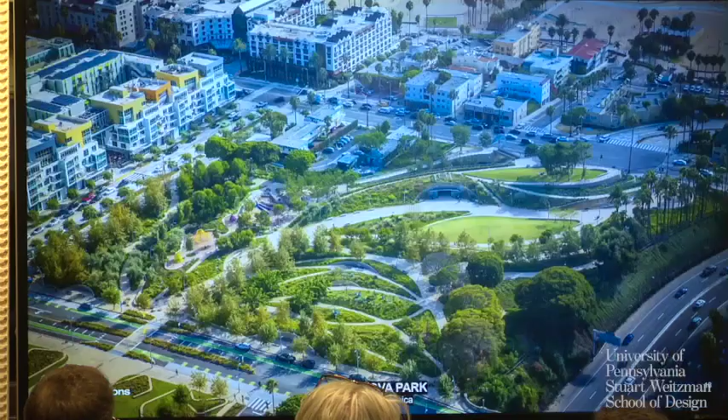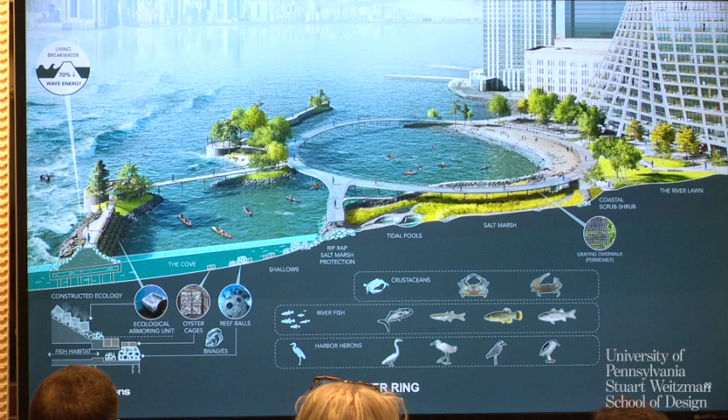This year's field operation celebrates our 25th year of practice, and we still believe in the power of nature in the city. The High Line, a simple garden walk that forever changed the west side of Manhattan. In Santa Monica, a parking lot is a topographically dynamic urban oasis. And the tunnel tops, opening much more recently, a park on top of a highway that has brought the city to the bay. Soon, the River Ring in Brooklyn will become vital habitat.

But these projects are not only successful at an urban scale or for environmental resilience. They're significant in the way they function for people at an intimate human scale.

As nature appears in the city, it renders place as a common ground for our social life, our most intimate relationships, our collective cultural expression and identity, our laughter and our play. It is where we make memories and come together to demonstrate, where we have civic discourse, where we exercise and move, but also where sensory stimuli engages our deepest emotions, provides us with comfort and serenity, and with that, a sense of belonging—really all of the essential, extraordinary experiences of our humanity.

So much of our practice is about shifting scales, from large plan and vision to designing for people.

And before we dive into the middle branch, I'm going to just touch on two other waterfront projects that have been in the office for a decade, because great plans need to come to fruition to affect change. So in that regard, I'm going to offer us all some motivation and inspiration, especially Brad and Ethan, because this is exactly where we are right now on the middle branch. We're launching that process right now.

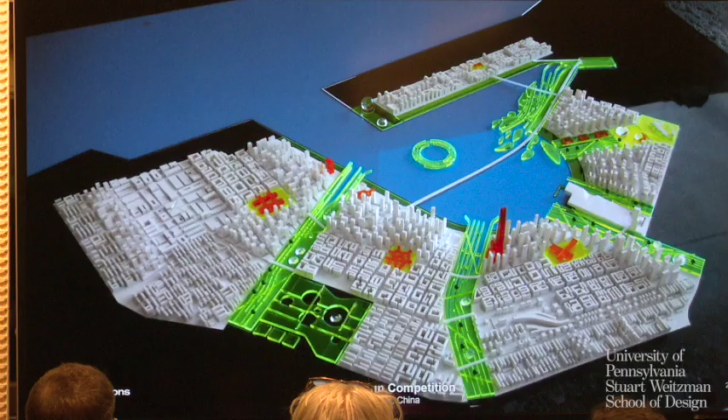So our 2010 competition entry for a new eco-city in Shenzhen was radical in scope and scale. It envisioned a city organized around its waterfront by a series of five water fingers. This resilient urban framework was the underpinnings of an integrated approach that defined neighborhoods, transit, energy, economic, and green systems.

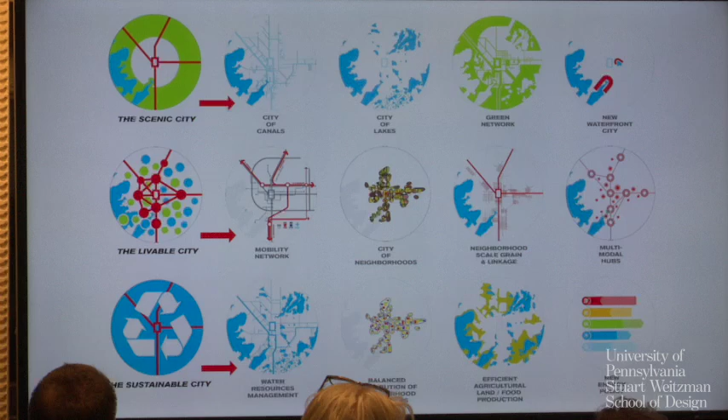Fast forward to today, 14 years later, and Shenzhen's 110-acre Guiwan Park anchors the edge of a new tech-focused central business district and is the first of those five green fingers to be realized. This is truly extra large-scale green infrastructure for stormwater management, flood protection, and biodiversity.

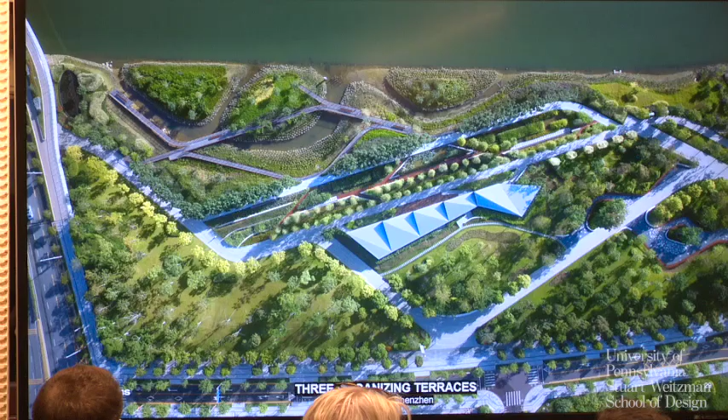Here you can see three organizing terraces: the uplands, the freshwater wetlands, and the brackish wetlands. The freshwater wetlands manage stormwater runoff from the city as a living filter. They too are botanically extraordinary—these hybrid landscapes, part performative wilderness, part botanical garden for pleasure and delight.

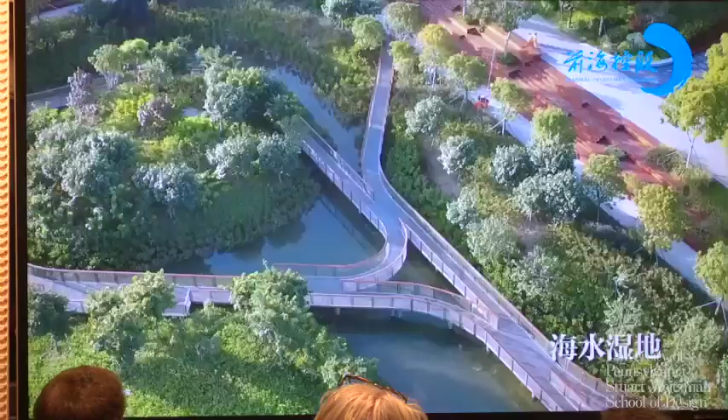Overall, Guiwan and its relationship to this resilient urban framework showcases the potential for urban growth to achieve both environmental and social impacts.

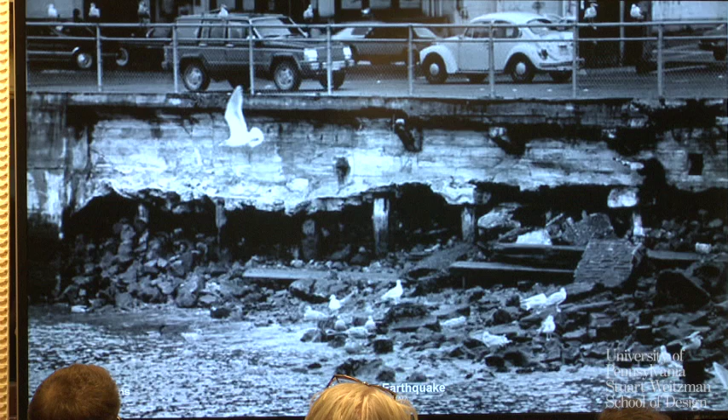Like Guiwan, now on the west coast of the United States, Seattle is a place that had turned its back on its waterfront. In 2001, the Nisqually earthquake presented the opportunity to fundamentally change this relationship because of the irreparable damage to both Seattle's seawall and its two-story viaduct.

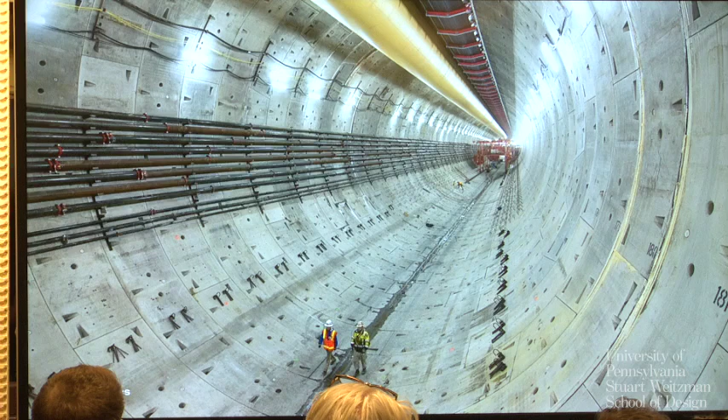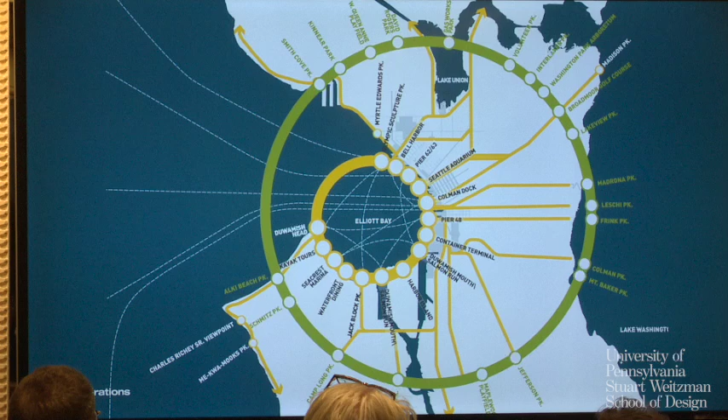So the city of Seattle decided to bury the waterfront freeway in a massive new bored tunnel, which opened up a huge new territory to rethink, an opportunity to rethink the organization of the city as a whole, developing, expanding, centering, and connecting Seattle's public realm to Elliott Bay, and to reimagine the edge of the city as an ecologically rich, connected green boulevard designed for people and habitat.

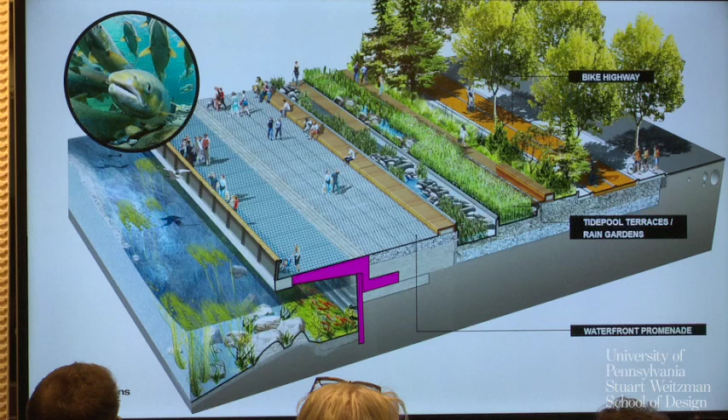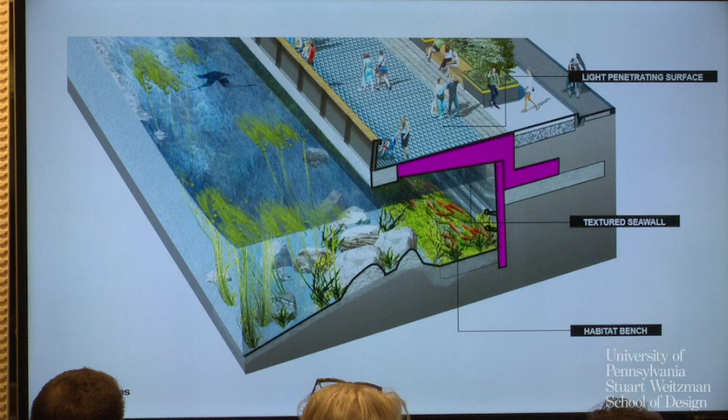By thinking about the edge holistically as a place for bike, pedestrian, and also salmon, and by pushing back the seawall, cantilevering the waterfront promenade with a new light-penetrating surface, a shallow habitat shelf is created, repairing a broken migratory line. The seawall has now been successfully overtaken by aquatic vegetation, reconnecting the food chain, and we have fish.

And where possible, the seawall was removed completely with soft and gently sloping beaches. And the new bike trail, just opening this past summer with its stormwater gardens, starts to provide a meaningful sense of place and to situate the edge in a more watery and verdant landscape that once defined the site. More to come this summer on this waterfront too.

But now the Middle Branch, yet another large-scale waterfront site with equally transformative potential. Unlike Guiwan Park or Seattle's waterfront, which are quite far away, you all have probably experienced the Middle Branch already, even though you don't realize it, because over 180,000 people pass over this largely forgotten site as they travel along the I-95 corridor each day.

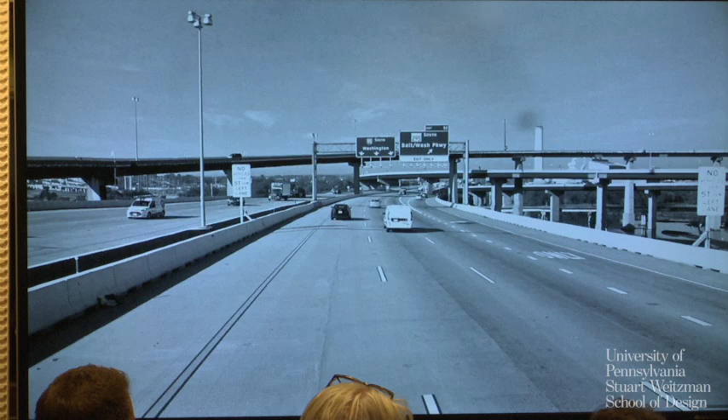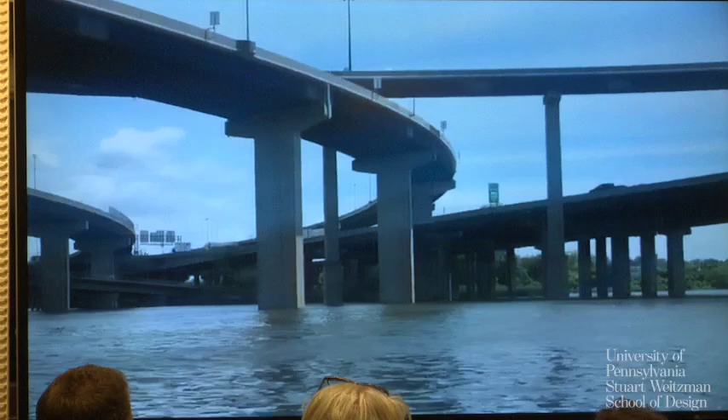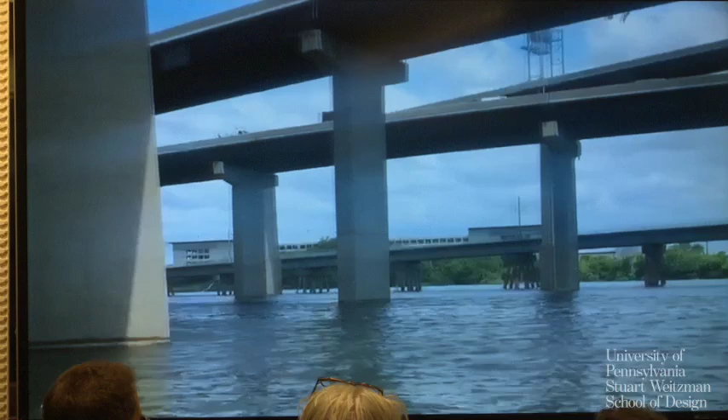The first day we experienced the Middle Branch below the spaghetti of highway infrastructure, what we heard was almost as important as what we saw: the sound of the highway, but also the chatter of some migratory songbirds that stop in Baltimore along the East Coast Flyway. This visceral experience of being on the open water, the cool breeze, the scale of the highway infrastructure surrounding us was kind of terrible, but both awesome and extraordinary.

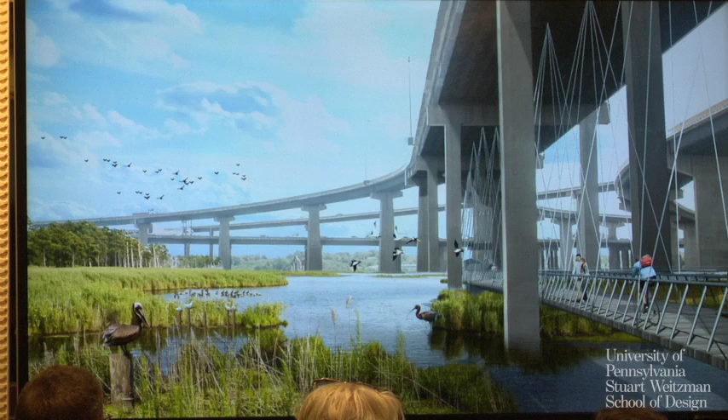But we didn't only hear the sounds of the site that same day as Brad's epic tour, which was so impressionable. We also heard and were moved by members of the community, and we asked about what is the Middle Branch's greatest asset. And again, we heard the same thing.

Good people. The people. That means the people is a real family vibe.

Strongest asset for the Middle Branch are the neighborhoods that surround it. The communities of South Baltimore are coming together and reclaiming their own waterfront, and they are establishing their rights to be there, establishing their own goals, what they want it to be, and they're charting a path for their future. So the strongest thing that we have going for us is us.

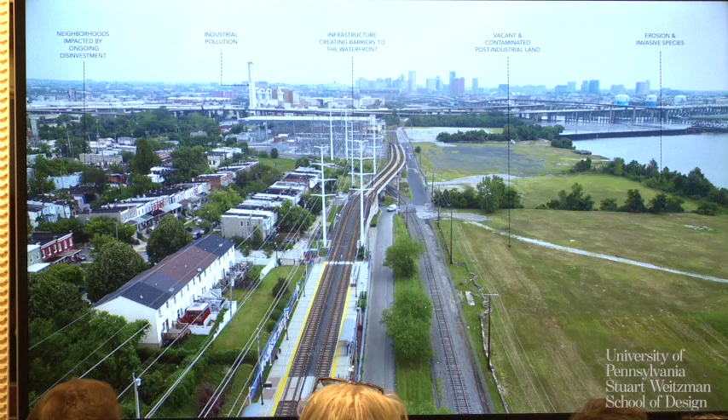Brad could not have said it better. The Middle Branch shows us how hard it is to overstate the connection between environment, health, and equity. And to that end, the scope of our project was perfectly expansive. I think, Fritz, you're right, the project did tick all of those boxes.

It also speaks to the power of new green and pedestrian networks to catalyze, improve access and connection, economic equity, cultural vitality, environmental resilience, and health and joy.

Our team was also expansive and multidisciplinary. It was not only field operations; as many of you know, we had 16 consulting collaborators, planners, multiple landscape architects, marine engineers, mobility consultants, JEDI consultants, just an extraordinary group of people.

And our process was and continues to be expansive as well, and Megan is going to talk about that in much greater detail. All of this really goes back to justice and equity, developing this project as a visionary plan, but also an iterative, community-driven initiative that amplifies voices not often heard. This plan is fundamentally about equity and justice, resilience and health, not only its physical transformation, creating new connections, jobs, wealth, and increasing quality of life.

I'm going to pass it on to Megan.

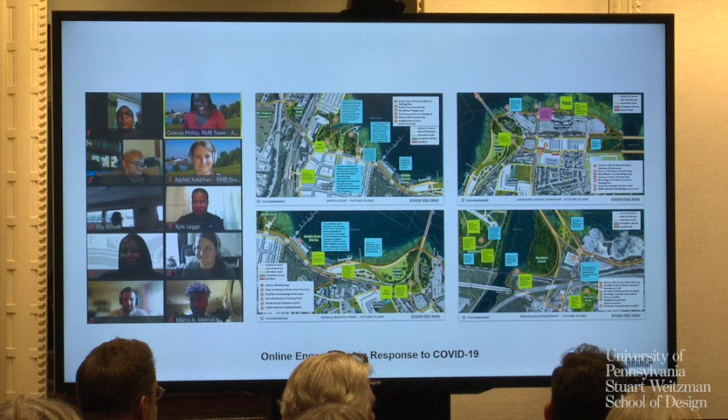This is our project map, and as you can see, we were doing planning work alongside consistent, varied, and iterative engagement throughout the whole 18 months we were actively working. We started online because we began during COVID in the summer of 2020, so we were doing virtual workshops when no one had done this before. We were discovering Jamboards on Google and Zoom, stumbling our way through it, while innovating with our local engagement consultants.

We had a very active social media feed, and we have an active website to this day. We insisted on innovation, and we insisted on our work always benefiting the community as we were moving forward.

We heard from day one that people were really skeptical of plans because nothing happens out of plans. They stay on paper, action doesn't happen. We're not going to trust that any of these pretty pictures are going to come to fruition, and if they do, it might be in 10 years. So we really took seriously the idea that we have to make change now, and bring benefits now. We did this in small ways.

For instance, on our Facebook and Instagram feeds, we did an interview series with members of the community, riffing on Humans of New York. We called it Voices of the Middle Branch, to bring community voices to the project so that it wasn't only us talking about these plans, but the community talking about their waterfront and their public space.

Once it was safe to be outside and be with each other, we started engagement in person. We created a mobile project hub and did pop-up engagement, visiting people in their communities at their events rather than always asking people to come to us. And when we did host events, we placed a big emphasis on community-centered programming and activities.

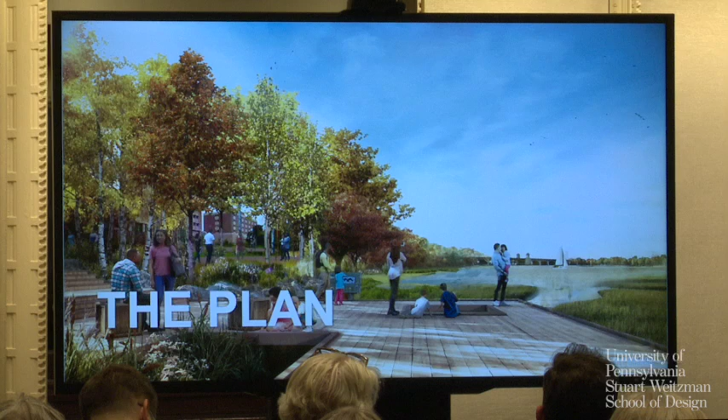So I think even before we get to the plan, we see all of this work as part of the plan. This is the plan in action. We're really proud that we were able to deliver these benefits alongside the long-term strategic thinking. We also hope that doing this type of work in a plan sets a new standard and precedent for what plans can do, and the type of action plans can take as the plans are being developed.

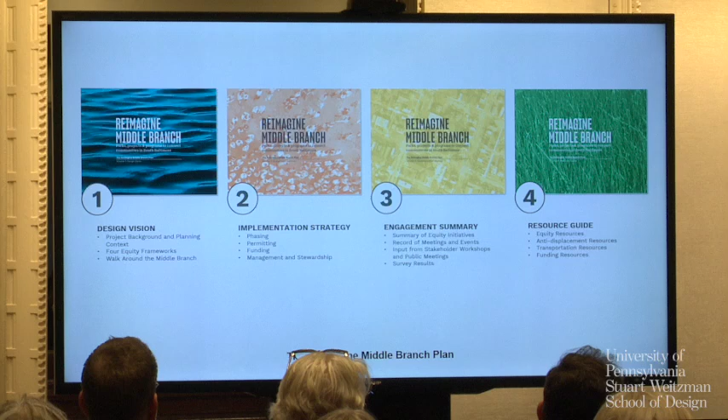And I think we have Ethan and Brad to thank for supporting these initiatives and these projects throughout the planning process. So now finally, 30 minutes into our talk, we're going to get to the plan and some of the long-term vision. So we produced over the course of 18 months a 4-volume document.

You can read it on our website, reimaginemb.com, if you're interested. We put together a design vision that looks at long-term, place-based transformations for the 11 miles of shoreline and the neighborhoods in South Baltimore. We also put together an implementation strategy that looked at how you phase this work, permit this work, who is going to fund it, and who is going to manage it—all really important questions to answer as you take on these transformative projects. We collated all of our engagement work to understand how community feedback shaped the plan, and we assembled a resource guide with deep dives into funding, anti-displacement, transportation, and more.

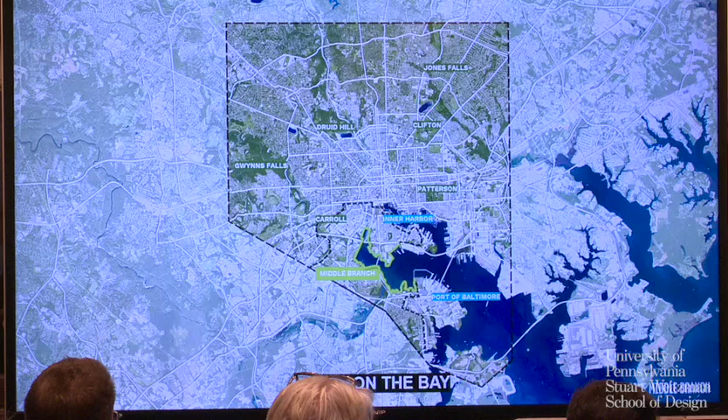Starting with a nuanced understanding of the site, the plan considers the Middle Branch at multiple scales—its place in the larger ecoregion of the Chesapeake, to begin. It's such an incredibly rich and dynamic environment. We asked ourselves, could we restore the Middle Branch's shorelines and reconnect to this magnificent ecosystem? We also considered the Middle Branch's role in the city. Baltimore is in many ways defined by its waterfronts—the industrial port, the cultural Inner Harbor—and we asked ourselves, could we create a green and recreational waterfront at the Middle Branch, distinct from these other places? And we considered the site within the context of South Baltimore.

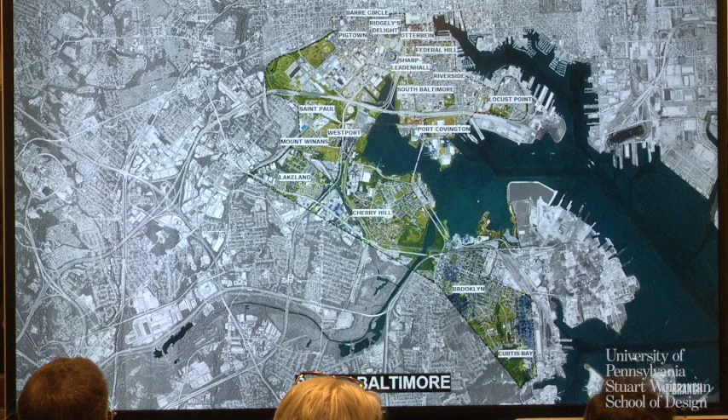This map shows the planned study area, which is quite large—as Sarah noted, 8 square miles. Rather than narrowly define the site as just the water body or the shoreline, we understood the Middle Branch more broadly as 19 neighborhoods, 30 parks, and 11 miles of shoreline.

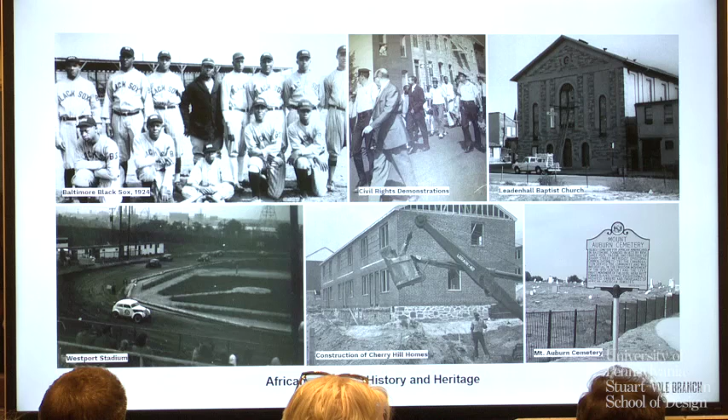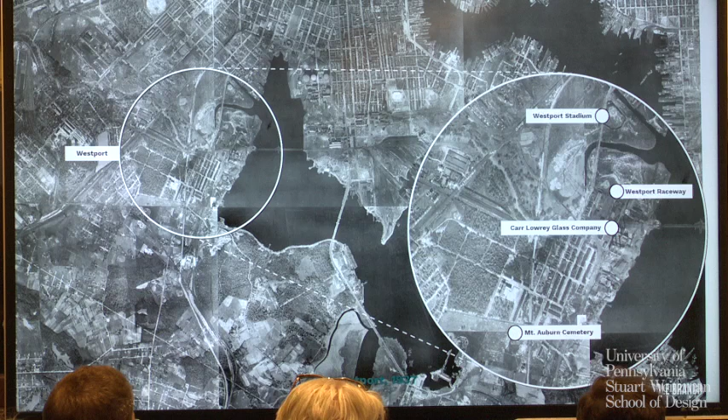We looked to the history of South Baltimore as we started, including the incredible legacy of African American heritage and culture in this area, which included two Negro League baseball teams and their stadiums. It was really the heart of the city's civil rights movement, and it houses, still today, Mount Auburn Cemetery. We also studied development patterns to understand what investment—but maybe more importantly, disinvestment—has looked like here over the last 70 years.

Along with the mapping and data collection, we visited every neighborhood and every park in the area to understand and appreciate the challenges, but also the incredible activities and opportunities that the plan needed to reflect.

The plan is organized into what we're calling 4 equity frameworks. These frameworks structure the work and recommendations that come out of the plan, focusing our efforts in 4 major areas. The first is to protect and restore the shoreline, speaking to the Chesapeake and environmental health. The second is about transforming barriers into connections—looking at that disinvestment, the slicing and disconnecting of neighborhoods and people from their waterfront and from one another. How can we heal those scars?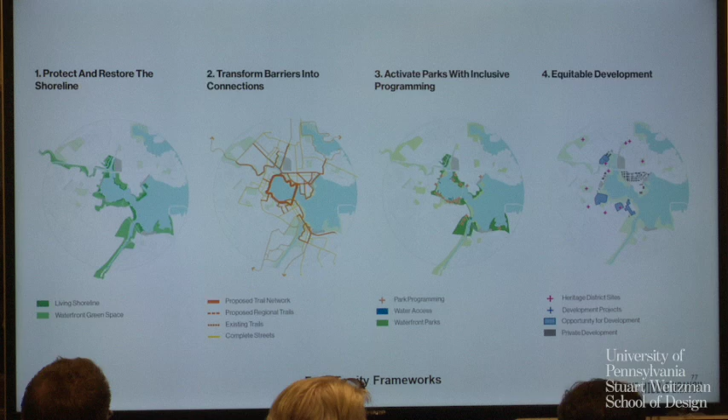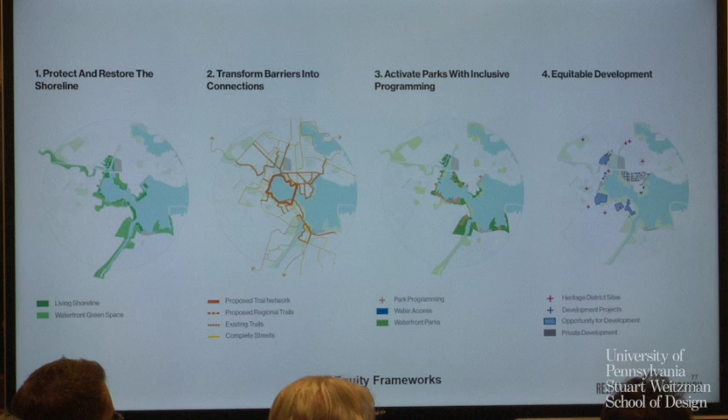Number 3: how do we activate parks with inclusive programming? How do we bring people to the parks and open spaces that are there? And finally, how do we think about equitable development and initiatives across this space to pair with these major public realm investments and improvements?

Altogether, the frameworks structure a series of short, medium, and long-term recommendations and investments in the Middle Branch. If you had to sum up the plan in one drawing, this would be it, even though it's very difficult to do. It starts to show the mosaic of projects across those 19 neighborhoods, starting at the waterfront and stretching into the neighborhoods, pairing transportation work with environmental work, parks, and development.

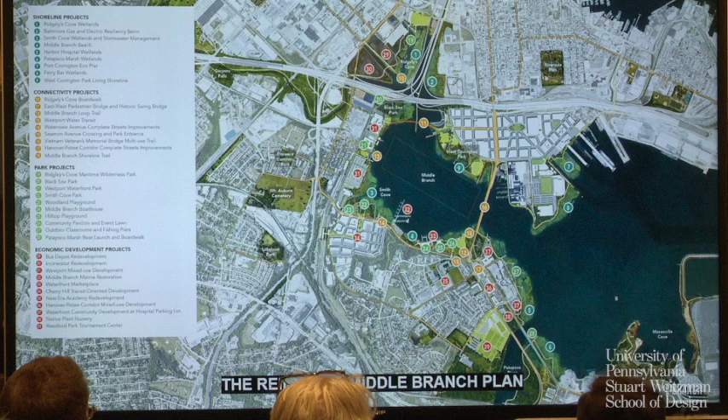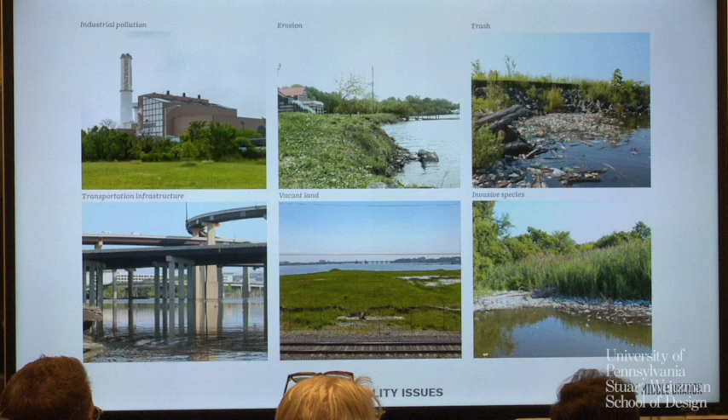I'm going to walk through each of the frameworks for you, starting at the shoreline. The Middle Branch, as we've seen, is this beautiful, quiet expanse with great views and access to the water, but there are a lot of environmental challenges, which you see here on screen. These are images we took during our initial tour. A lot of this is due to its location—the Middle Branch sits at the base of the Patapsco watershed.

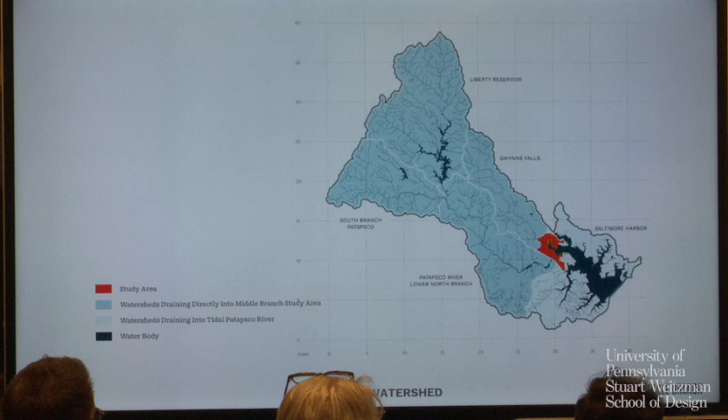What this means is that erosion, sediment, and all the types of pollution you see are concentrated and drained to the Middle Branch. So the Middle Branch carries this huge burden, and you see that in the poor water quality that's there today.

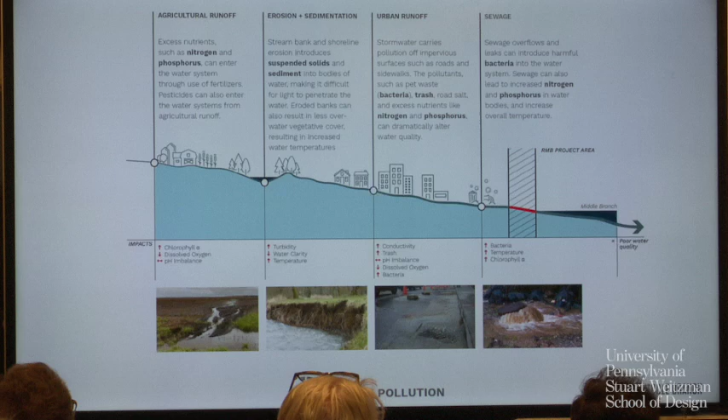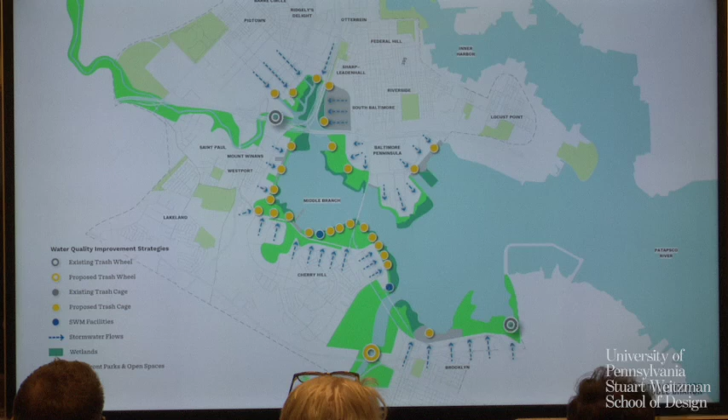So we mapped this to understand exactly where the outfalls and sources were, and then we overlaid on top of that a series of recommendations and improvements to look at the health of the water, the health of the ecosystem, and the shoreline.

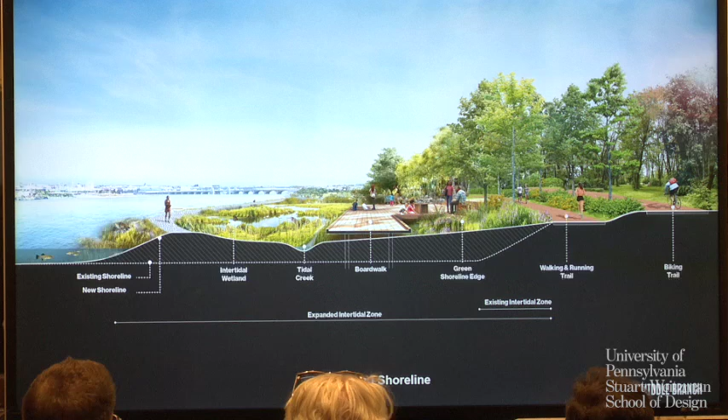Really, our plan looks at a continuous living shoreline, 11 miles of continuous living shoreline, soft green and resilient edges that expand the intertidal zone and protect from flooding and storm surge.

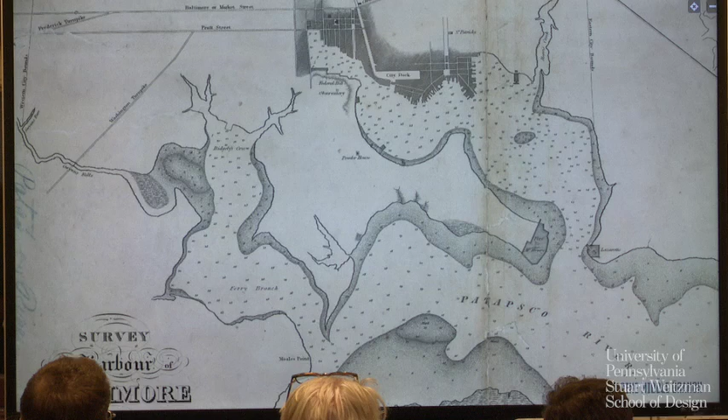This is really what the Middle Branch has been. This is a historic, pre-industrial map, and you can see this thick gray band are wetlands and marshes of the past. This is the Patapsco. It no longer looks like that, but this is sort of our North Star in a way.

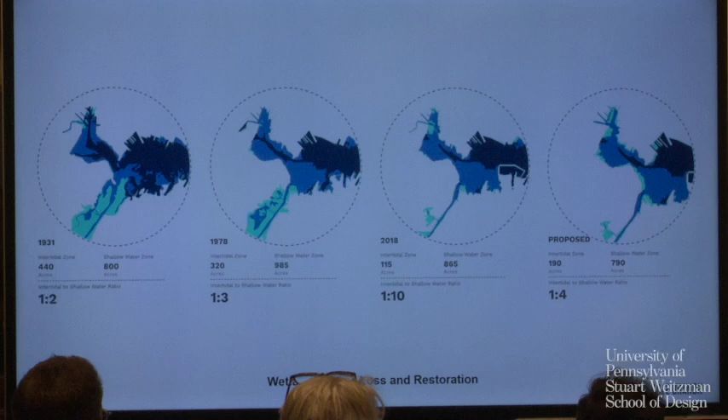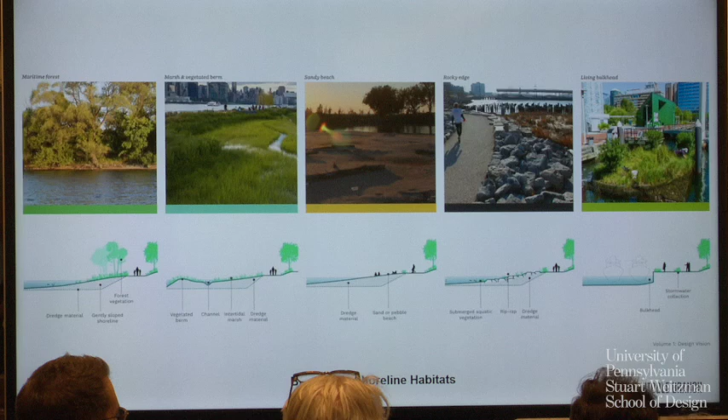This shoreline, this intertidal zone, allows us to create diverse shoreline habitats and areas. So the soft edges are not always the same. There's quite a diverse mix around the edges.

And these soft edges are going to not only create new habitat and new biodiversity and new places for nature and for people, but they're going to serve as protection for some of the area's critical infrastructure, including a regional hospital and the Baltimore Gas and Electric plant.

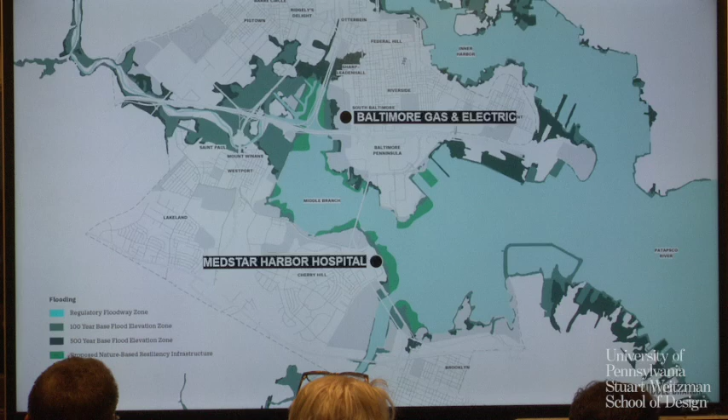The shoreline is also a place for people, offering access to nature and environmental education.

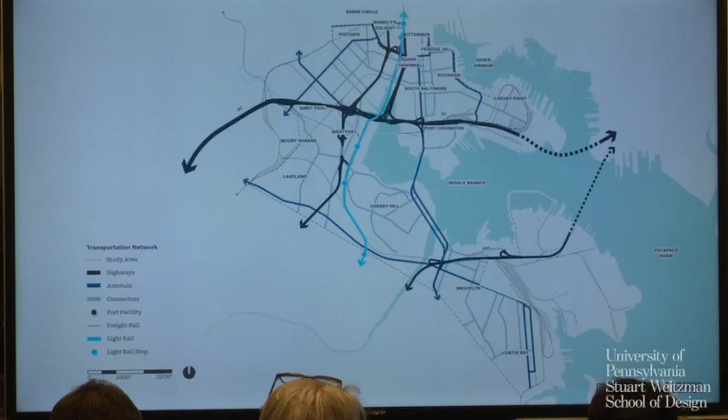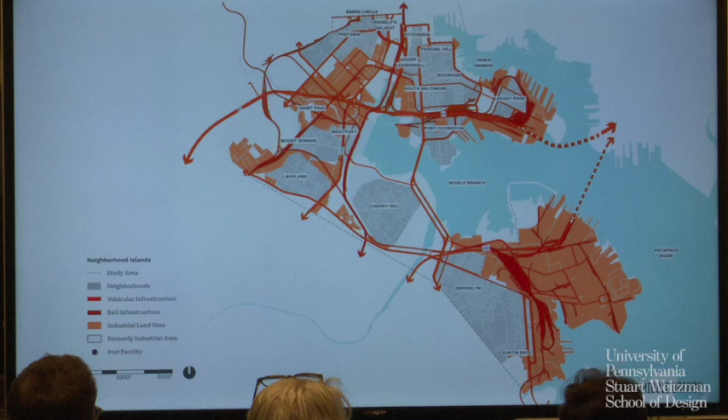Our next framework is about transforming barriers into connections. South Baltimore is filled with transportation infrastructure as well as industrial areas. All of this network creates barriers and really isolates neighborhoods into islands, separating them from one another and from their waterfront.

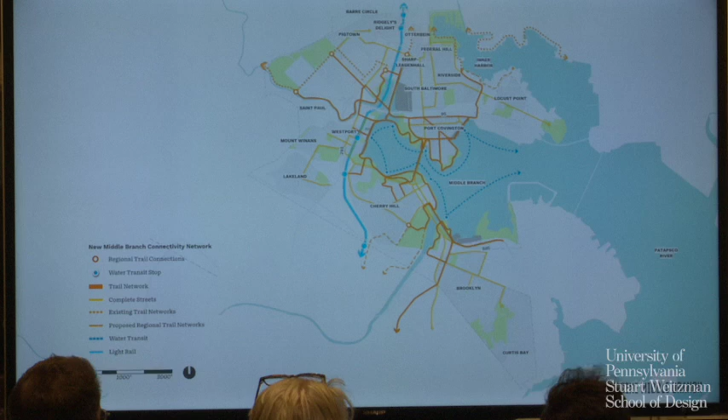So we're trying to transform this into a new system of connectivity and mobility: trails, complete streets, connections to transit, connections to water across the area. Our outreach efforts revealed there was a real desire for better pedestrian and bike connections in this area, and so the network really emphasizes this type of mobility.

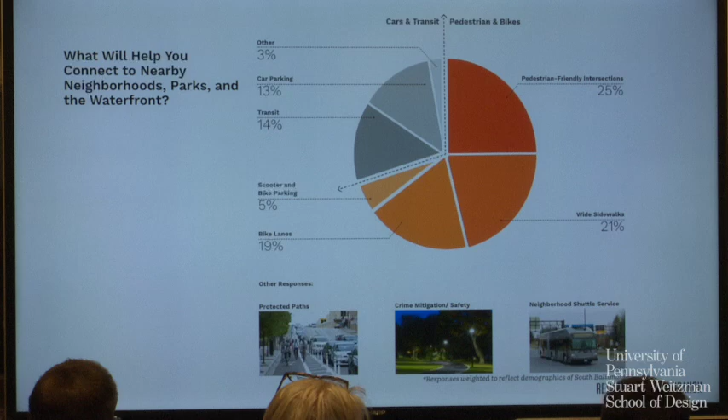The network centers around a new 3-mile loop trail at the heart of the Middle Branch. There would be separated bike and pedestrian facilities there, and from there, like spokes on a wheel, you would have complete streets and shoreline connections reaching back into neighborhoods.

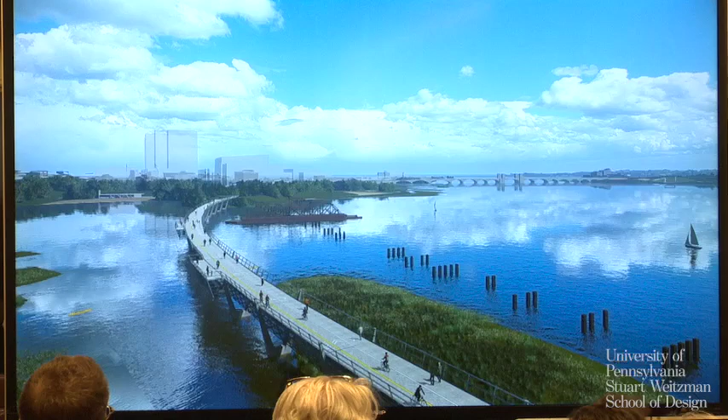The plan also recommends significant changes and improvements to two bridges that cross the Middle Branch. First, the Vietnam Veterans Bridge, which is in the distance. And then here in the foreground, you can see an east-west pedestrian bridge, which would essentially close that loop.

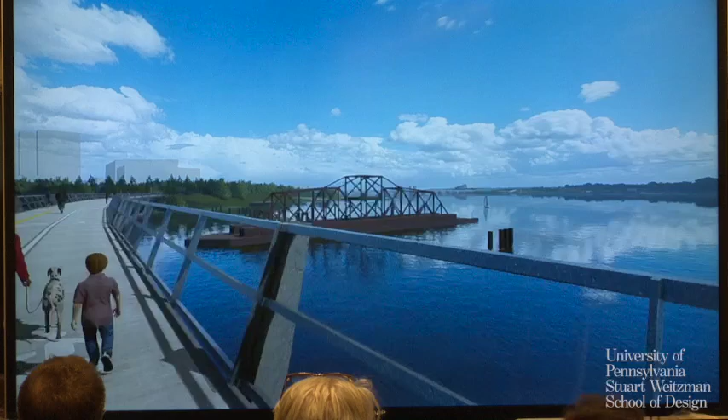For the trail, it would connect the neighborhoods of Westport and Mount Winans to the new Baltimore Peninsula development. And it would hopefully offer access to the historic and iconic CSX swing bridge here, which is a real fixture in the water that no one can access today.

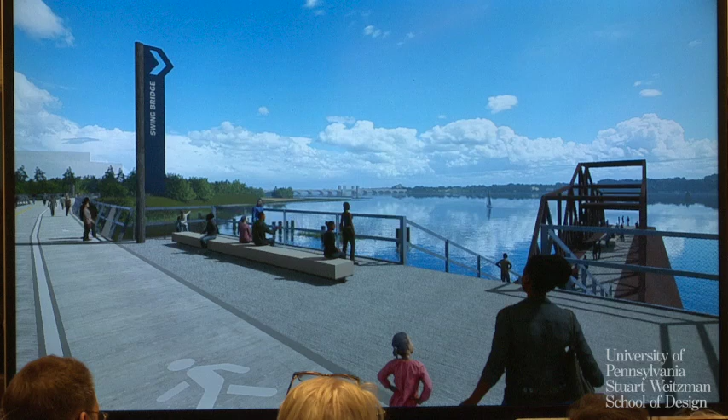Our third framework was about the park system in South Baltimore. Ethan coined the term 'park shed,' like watershed, and we love this idea of a connected system of parks.

It's already a place rich with parks, and as we worked with Baltimore Rec and Parks, they said, please no more parks, we have more parks than we can manage. We hear this in Philadelphia too. It's very difficult and costly for cities to manage their park system.

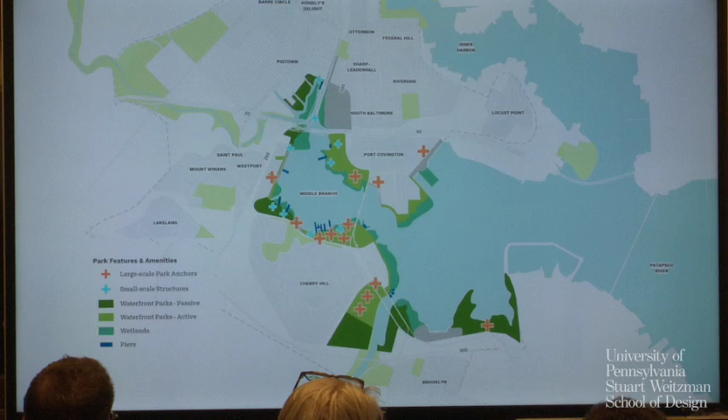So rather than growing the number of parks and expanding park access, we really looked at improving the parks, activating the parks, enhancing the parks that were there. This map starts to show where those improvements and activations might happen.

We took cues from a project that was already built, a sort of pilot project in one of the parks around the waterfront. This is the Middle Branch Fitness and Wellness Center, a $25 million facility opened in Reedbird Park during the planning process. It serves to activate and animate this park and provide amazing benefits to the communities here. There's pools, sports fields, community centers, and how could we take the same approach and move that around the entire Middle Branch?

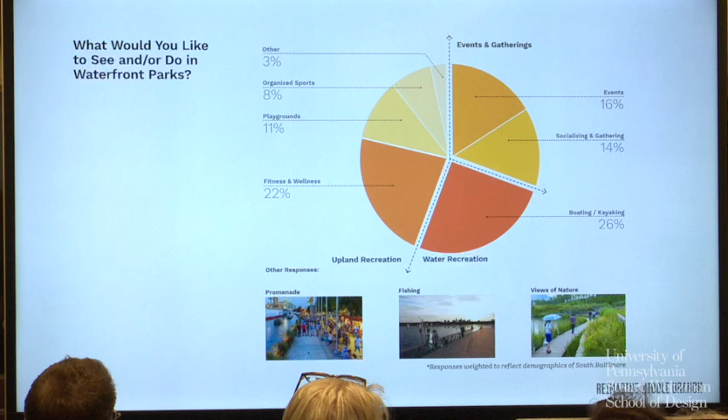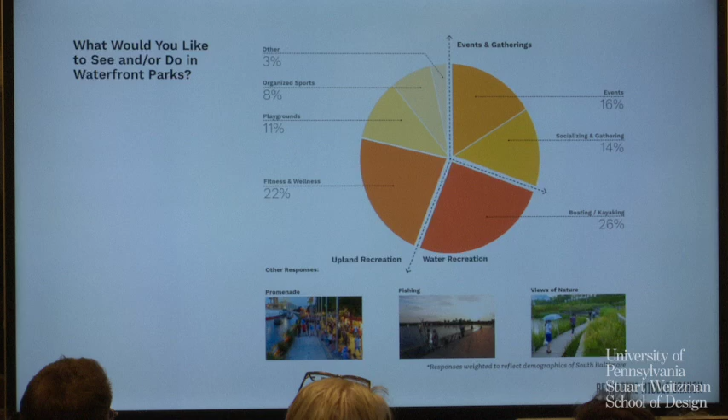We asked people what they wanted to see and do in their parks, and there was a real desire for access to the water, so more water-based recreation. There was a desire for events, for socializing and gathering, and there was a desire for family and fitness activities. So that's what we did.

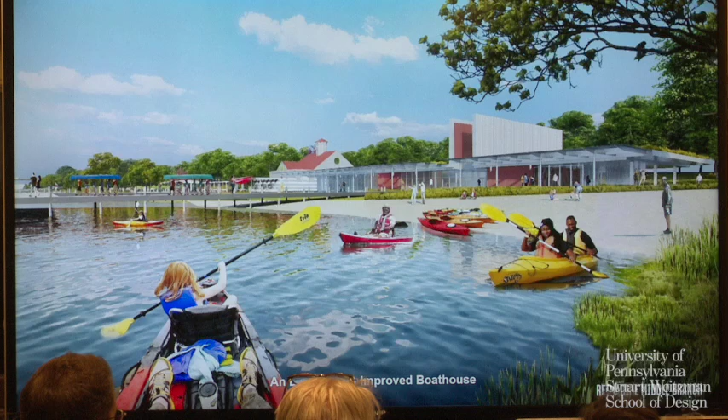We located new spots for fishing piers and boating piers around the Middle Branch. We recommended a major expansion of the boathouse into a boating campus that would allow really popular programs today, like Baltimore Community Rowing and Middle Branch Rec and Parks nature-based recreation, to expand and thrive.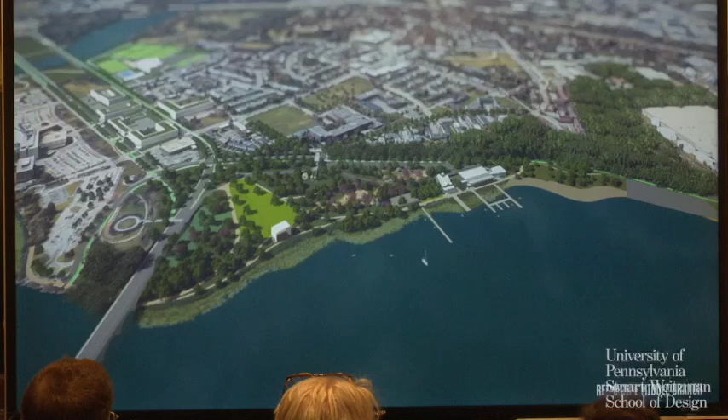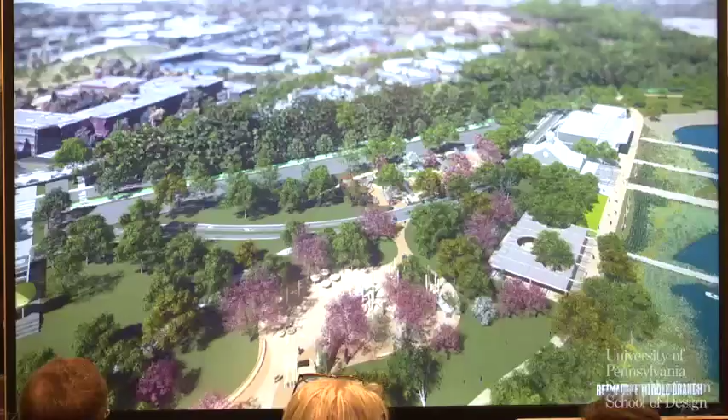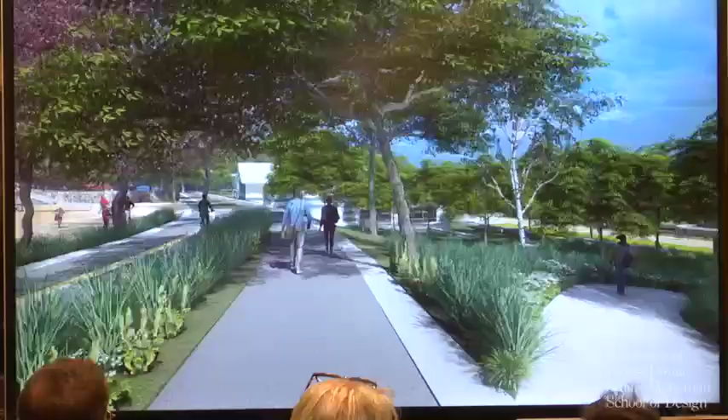In existing parks like this - Middle Branch Park today - you can start to see how those new improvements are layered to attract more people and activity and bring people to the water. Here you can see a new playground and family spaces. Soon we'll go down the hill and you can see a large pavilion. There's a real desire for more spaces to hold family reunions, gatherings and parties, and then larger events like the Cherry Hill Arts and Music Festival that happens every July 4th.

Finally, we looked at equitable development. There were concerns that this work all going to be for the folks in the neighborhoods? We got asked the question a lot: is this for me? This doesn't look like this work is for me. Is this going to raise property values? Am I going to be able to stay in my home? Those were all big concerns that we aimed to address in the plan in several different ways.

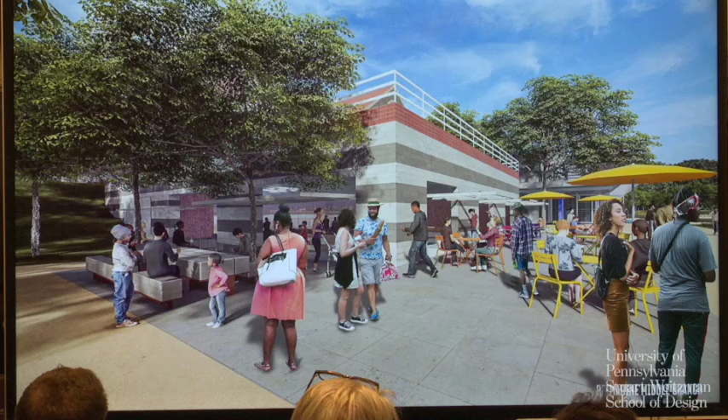We looked to bring jobs, opportunity, and education programs, and layer those into the plan along with our public realm improvements and investments. These initiatives were intended to serve the established communities in South Baltimore. We look to sustain

and expand investments in workforce development, in small businesses, in CDC capacity building. Brad's organization has, I think, supplied close to $1 million in CDC seed funding over the past 5 years, and more of that is to come and recommended in the plan.

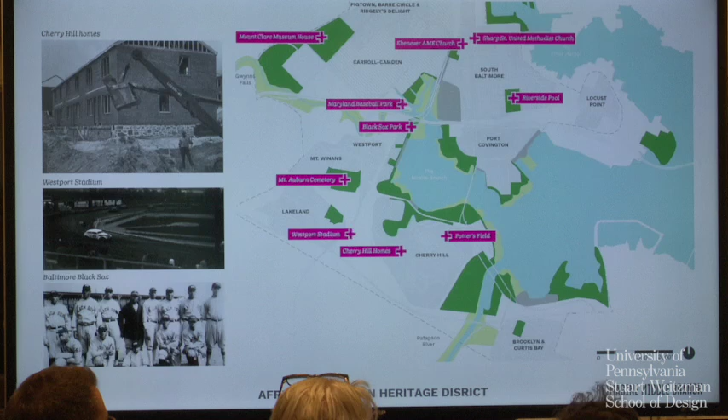We want to continue the youth and education programs we piloted as part of the plan, so more fellowships, more after-school programs. The plan calls for the establishment of a new heritage and historic district in South Baltimore, to honor and commemorate the sites but also celebrate current cultural expression. And then find ways to support new green businesses and ventures connected to the projects as they come online.

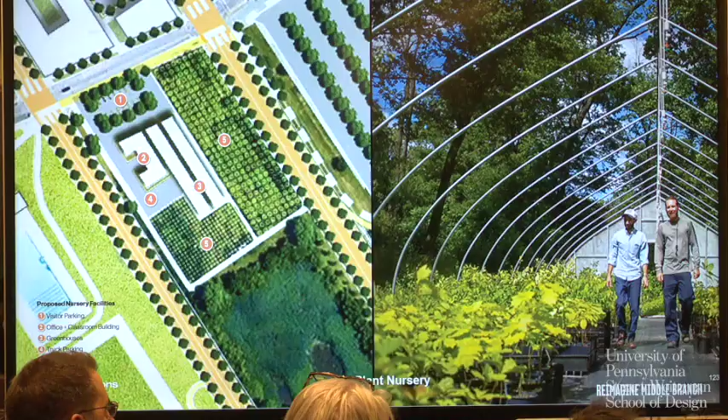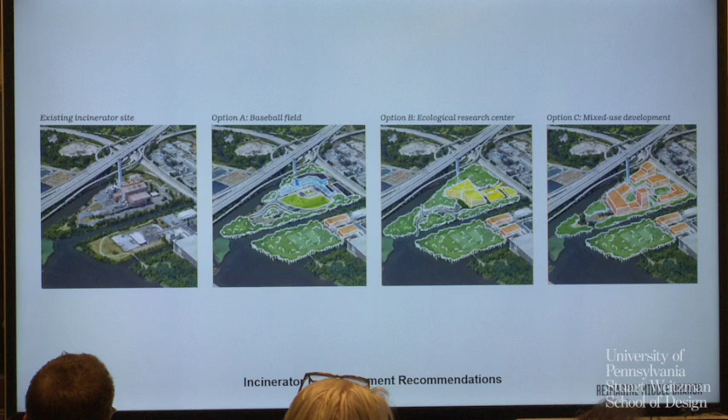For instance, developing a native plant nursery on site so that the plants needed for the new marshes, wetlands, and green streets are grown in South Baltimore by community members in South Baltimore. And finally, we looked to outline development scenarios for key sites around the Middle Branch that we saw were opportunities for change. Certainly the incinerator site, which is the largest source of air pollution in the city, needs to be changed. That is a huge burden on the communities here, and it shouldn't be there. So what can we think of as alternative futures for that site?

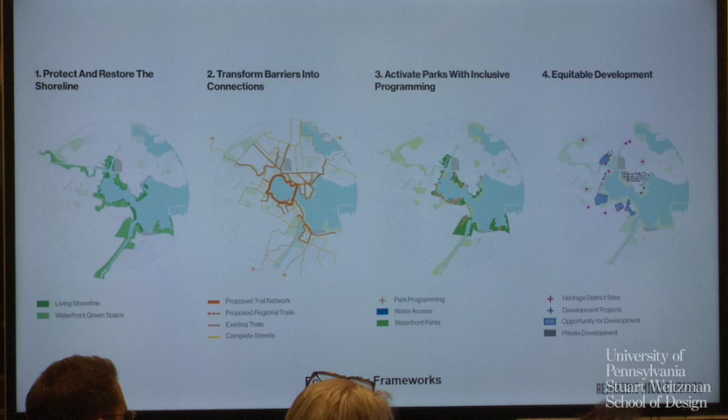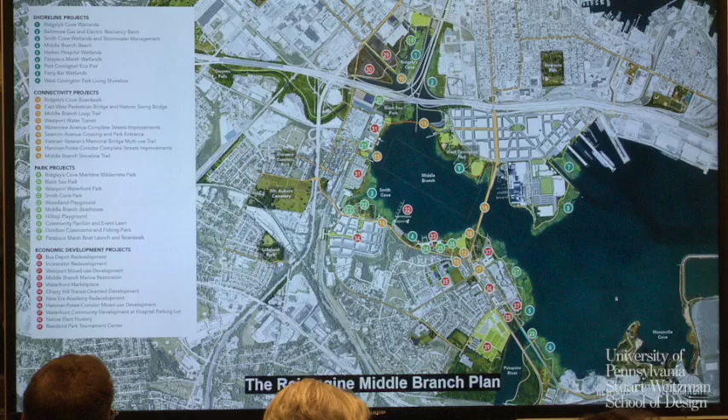Just to recap, the plan pulled together many different ideas, as Sarah said - quite expansive, multidisciplinary, integrated and holistic. The ideas all work within these 4 frameworks and together create a plan for Baltimore's next great waterfront, with 11 miles of world-class trails, parks, programs, and economic development. The plan marries a transformative vision with extraordinary action, including over $175 million invested already.

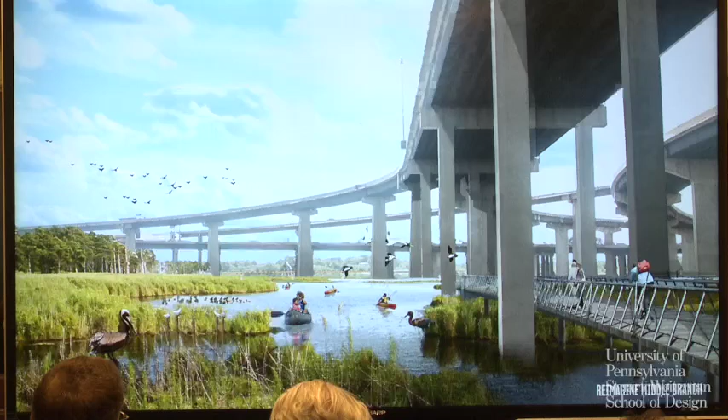The plan is not only possible, but it's already underway. South Baltimore deserves no less at this moment in time. Reimagine Middle Branch is not too ambitious - it is just ambitious enough.